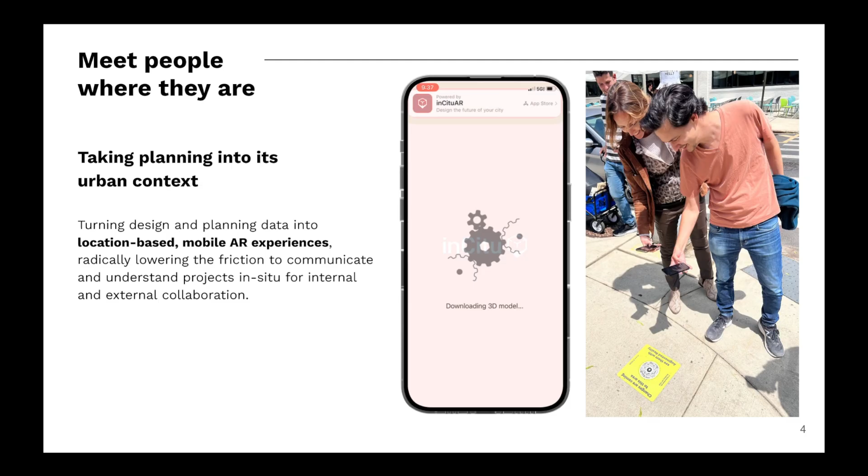Thank you, Nick. Kieran, thanks for being here. So Kieran Farr is the founder of 3DStreet. He started his career in video streaming and 3D software development, went on to leadership roles at video streaming companies like Vimeo, Bitmovin, and Brightcove. And in the past decade, he's become very active in transportation and environmental advocacy in your home, San Francisco, right? You've worked with organizations like Safer 17th and the Sierra Club to bring about positive changes in local communities. This is part of the work that led Kieran to develop 3DStreet and to productize these learnings to help planners and advocates more effectively.

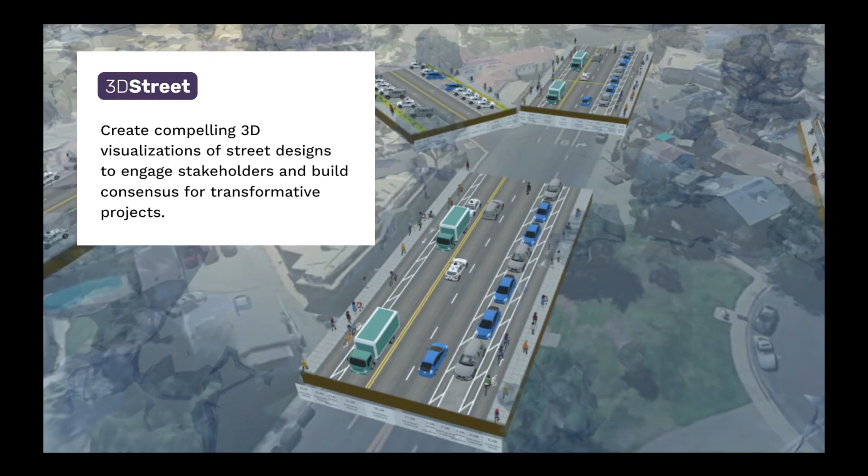And so, Nick and I thought it may be helpful to talk a little bit more high level about what are the problems that we're seeing in the market that everyone has, and then how do we use these tools in order to address these problems. So on the next slide, and this is not necessarily a new statement for some of you, but for some of you, maybe it's the right way to think about this, is that at the core of what we do is that we're trying to bring communities and stakeholders along for the ride of the vision that we have for safer streets.

One of the biggest challenges is that it's really difficult for most people to imagine that the built environment changes, and therefore it's tough to talk about what these changes could be at a level playing field. So why does this matter?

The impact of this information asymmetry between the community and professionals and engineers is that it leads to projects that don't have political support. They're pushed back, watered down, delayed, or canceled. That's what we're trying to improve—how can we do a better job of using these newer tools and working with communities.

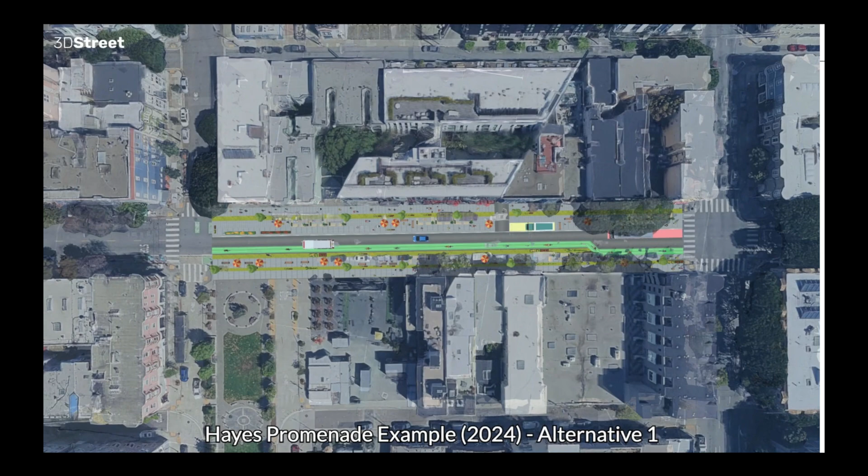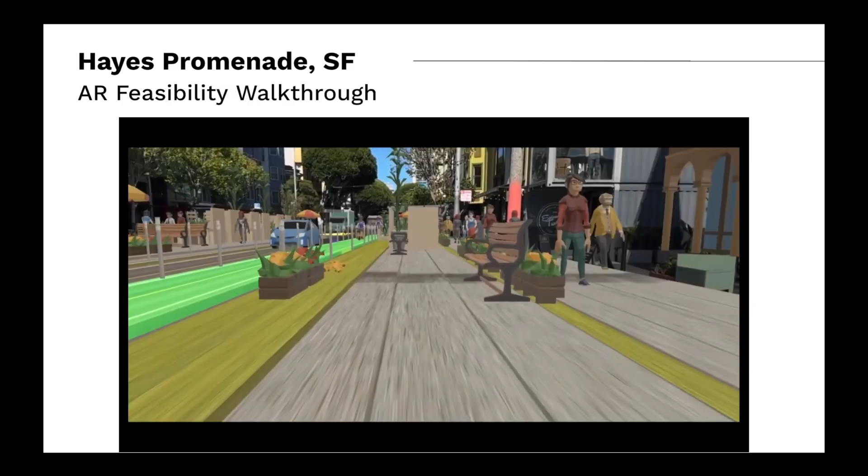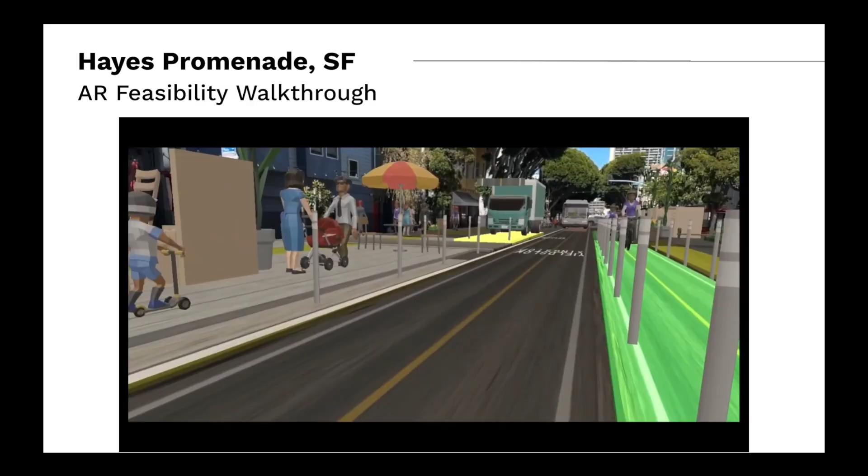But Andrew took it one step further, and what he did is actually converted this into an augmented reality scene. The word I like to use a lot is feasibility. What you're going to see here is that it's not beautiful, right? This is not going to win an award for the best rendering engine ever. The point of this is to be representative about the use of space and to be able to make those changes as rapidly as possible so that we can iterate on a solution that actually works.

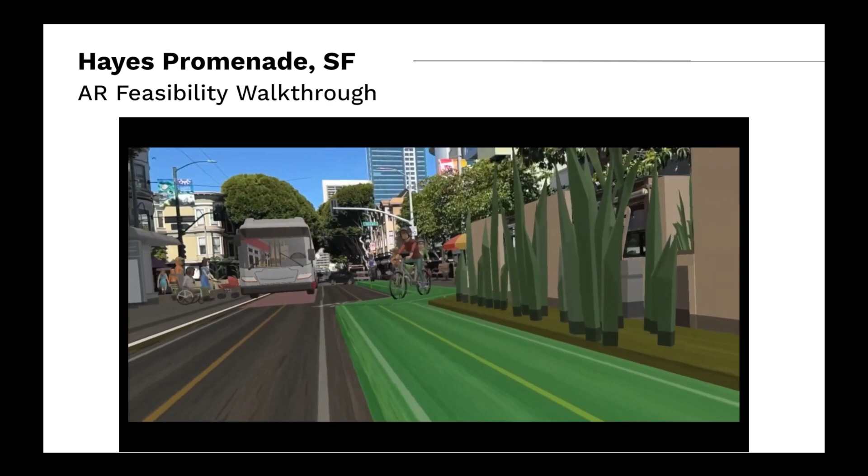As Andrew's walking through the scene, we see a couple key elements here, and he's going pretty fast.

One of the crucial stakeholders at the beginning is emergency vehicle access. Can the fire truck fit? Can there be enough clearance if they're going over the safe hit posts for the new configuration? The next thing that's crucial for this project is support from the businesses.

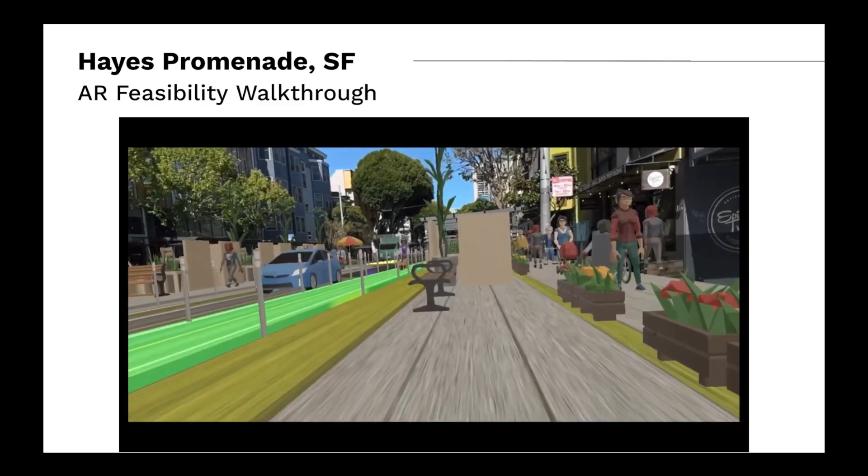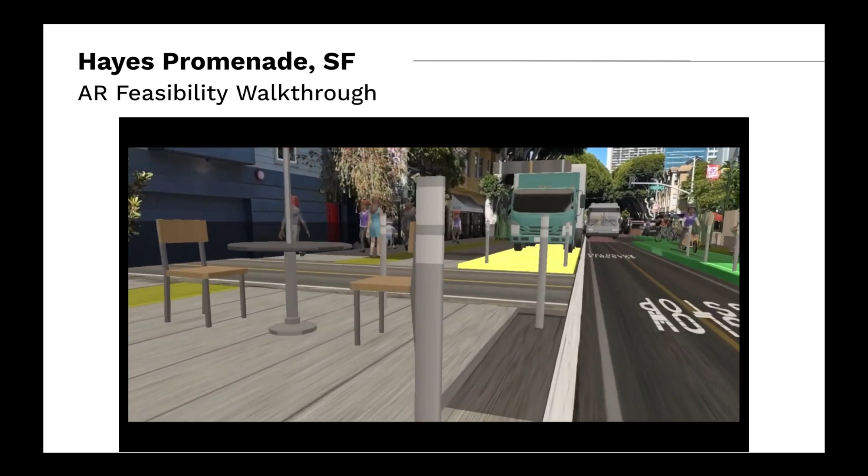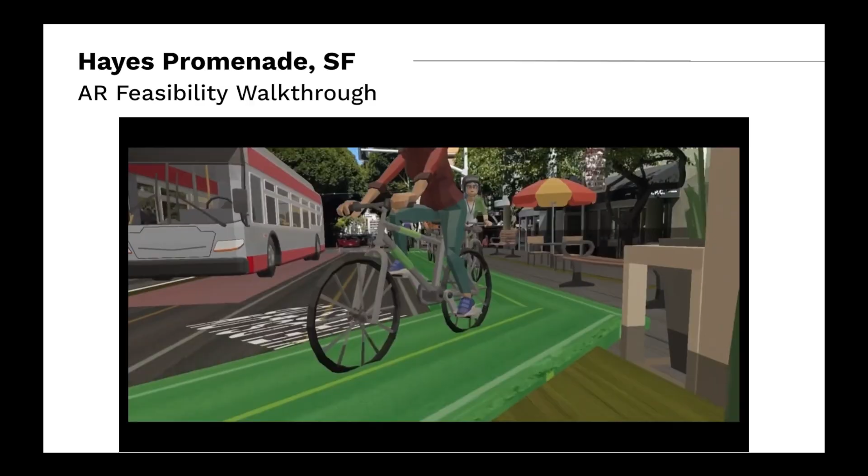There we look at concepts such as access to existing garages, access for loading or unloading, and then the number of new tables or seats these businesses could have—most of them are restaurants and bars. There's a lot of positive benefits the businesses can have, but they need to see that it's possible. This has been a crucial step to get those businesses and organizations on board to say, okay, it's possible.

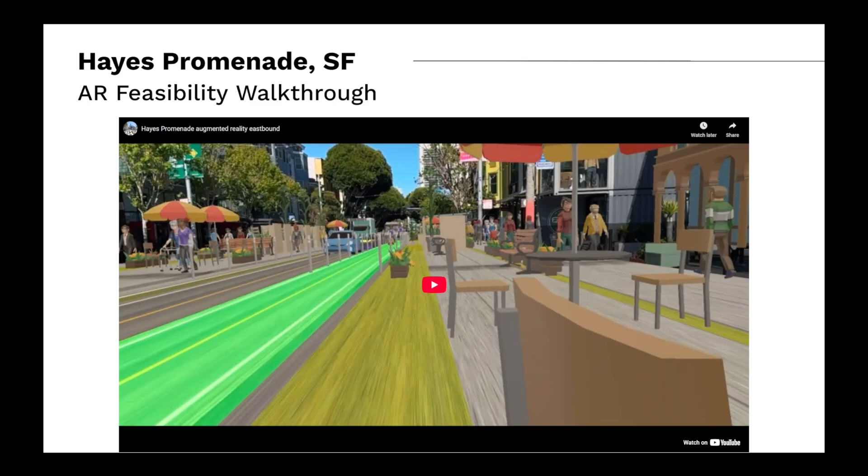That moves along to the next step, where instead of folks who are on the fence or even obstructionists saying this is not going to be possible, we can at least say, okay, I can imagine a world where we could convert this and still get the things I need for my business.

So just as a quick summary, the process was: create one example of a design, export that, go on site, record the video, and then use that asset in discussions with local businesses—actually showing the augmented reality scene live with community stakeholders.

Just to illustrate how quick it is, I was out yesterday morning with a model from 3DStreet that I brought into inCitu. I live in Queens, on Queens Boulevard, which had some recent street transformations with a bike lane separated by a new parking lane, and they've been calming this for a while. I took a quick model from 3DStreet into Queens Boulevard, and we could talk about how, like Kieran said, it's not perfect—this model wasn't designed for Queens Boulevard, so it's not really applicable.

But even using this random model, I was able to get a couple quick insights. One, there's maybe even more room for expanding sidewalk space on Queens Boulevard. I was also using the existing street lights to scale it. Another thing is you notice occlusion—cutting out real people and my body from the 3D model can be a useful tool for exploring how real people interact, and for communicating this way. You can see real cyclists and stuff coming through there.

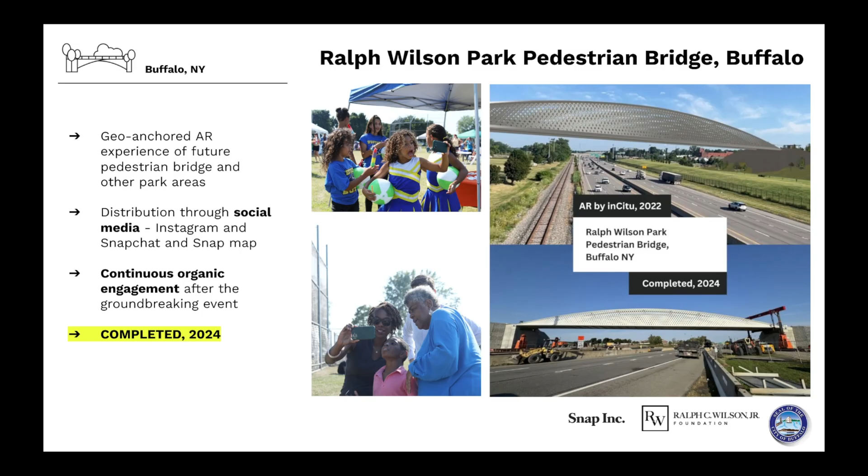All right, so maybe you could share about this project in Valencia Street. Totally, yeah, and I just dropped a link into the chat. This has become kind of an infamous project in San Francisco. Valencia Street is another high-intensity commercial corridor, lots of bars and restaurants. What this video is showing is an example of how we could show different street configurations.

Very specifically, they're changing from a center-running bicycle facility to a curbside bicycle facility. One of the biggest confusion points for a lot of community members is: how are we going to be able to deal with parklets? Where will this stuff go, and what does that look like?

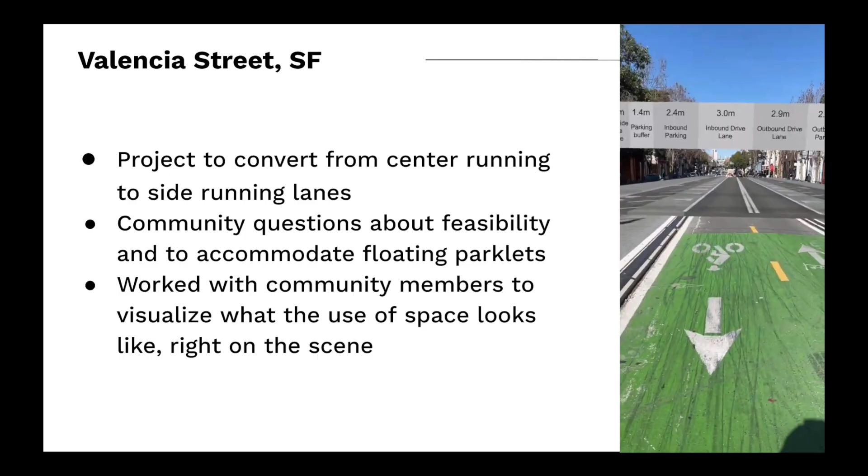And so this was one of a few different ways for folks to be able to understand what are those changes that are going to happen, and how will that affect both the users of the street and the businesses that are on the curbside.

So if we go to the next slide, I wanted to show a little bit more about how this was made, because this is something you can do within a few minutes to create something very similar. Then we can talk about different techniques you can use to make this compelling content that's going to help move your project forward.

So this is a view of what we had just seen in augmented reality, but from a little bit elevated perspective inside of 3DStreet, where you have the target redesign placed in context in the actual location where it's proposed.

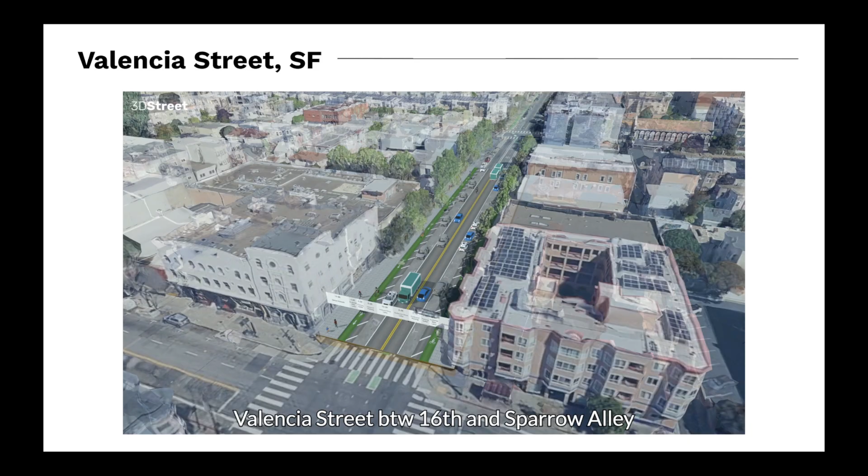So if we go to the next slide, here are the basic steps. We're going to go deep here.

The basic steps are: we want to actually create a scene, choosing a location, and we put in the street. We make changes to modify for current conditions. And then, very importantly, we have a new feature made for partners like inCitu, where you can export the scene as an AR-ready model.

Then inside of inCitu, you import that, you localize it into the proper location, you go to the field for fine-tuned placements, and then you can create those visuals that you'll need for storytelling, either for on-demand or live with groups like Nick was talking about for community building and engagement.

So we wanted to jump and actually get a look at 3DStreet. I want to give my screen share over to Kieran to show you a little bit about how it works.

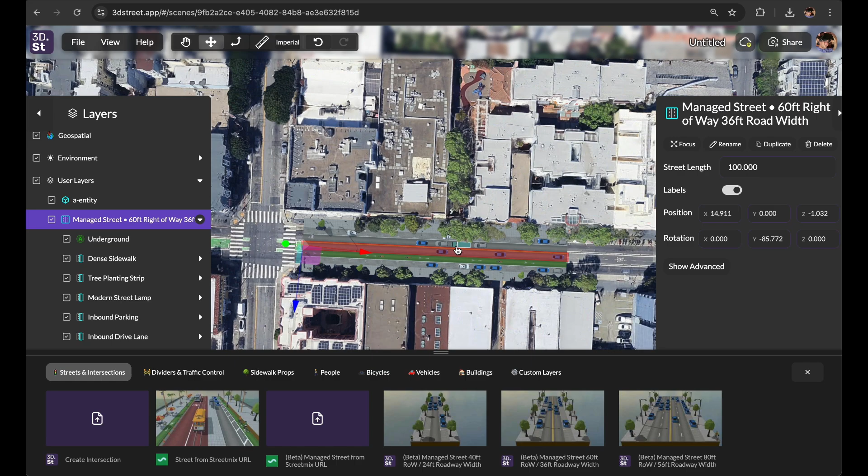Let's say we want to add a bike lane. So we'd duplicate one of those existing lanes, change it into a bike lane, change the width perhaps. This will not win any Safe Street Design Awards, but the point is to show we can do this very quickly, and it's not meant to be perfect. The goal is that we get something usable enough that we can then go to the field, see if it's feasible, and then rinse and repeat.

So we've done something basic — it's good enough for our test. We'll then click the Share button, and download this as what's called an AR-ready GLB file. This does a couple extra preparations so that those models are ready to be viewed in a third-party augmented reality app like inCitu. I'll press that button, and it'll take a second. Now we've just downloaded that GLB file.

I'll pause my screen share so we can see what that looks like from the inCitu application. We'll then take that GLB file and place it in the location. Great.

So once you've got your GLB file from 3DStreet, you can upload it to inCitu AR.

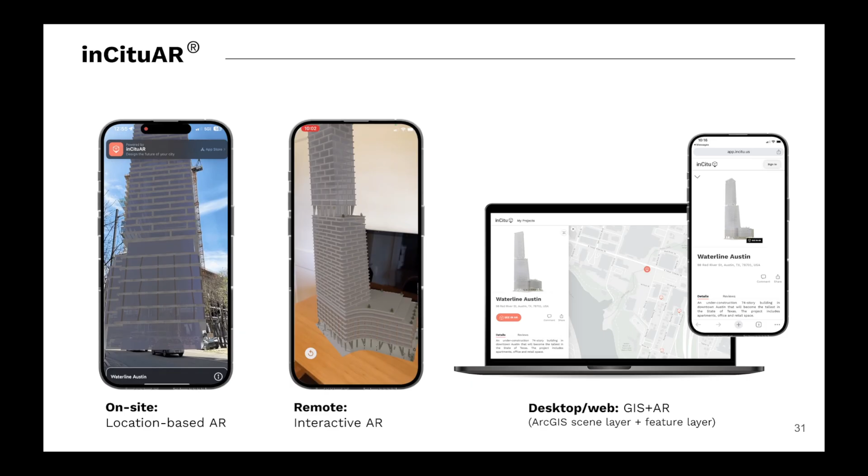So if your model isn't lined up with the georeference on the first try, you can make adjustments to fine tune it so that it looks the right way from the viewpoint that you're intending.

And then we're going to talk about, once you've got it lined up on the site, how to capture videos and content that you'll be able to use at meetings or stuff like that. So this is the step where, hey, we have something we'd like to share.

And what I have been learning is that there's another art to master, which is how do you then create compelling content from that? I'll share a couple of tips from the work that I've been doing, but there's definitely more to explore here.

And I would say that this is a category that's very interesting in its multidisciplinary nature, combining video production skills, communication skills, civil engineering skills, augmented reality design skills. Exactly, it all kind of comes together.

So what we're seeing in this example is a couple very purposeful decisions, where the placement of the model is purposefully offset from the actual location where it will start. We did this because it was confusing to people if we only showed the proposed conditions and you couldn't see the existing conditions.

Another thing that we did was to elevate the placement of labels. Inside of the 3DStreet app, you can modify the location of the labels that show measurements and the type of use for each lane.

And then you'll also notice it's casual but pretty effective to actually be doing the movements or motions that someone in the situation would actually be doing. In this example, it's walking across the crosswalk with a light, so it's relatively safe, but it's also showing the multidimensionality of it.

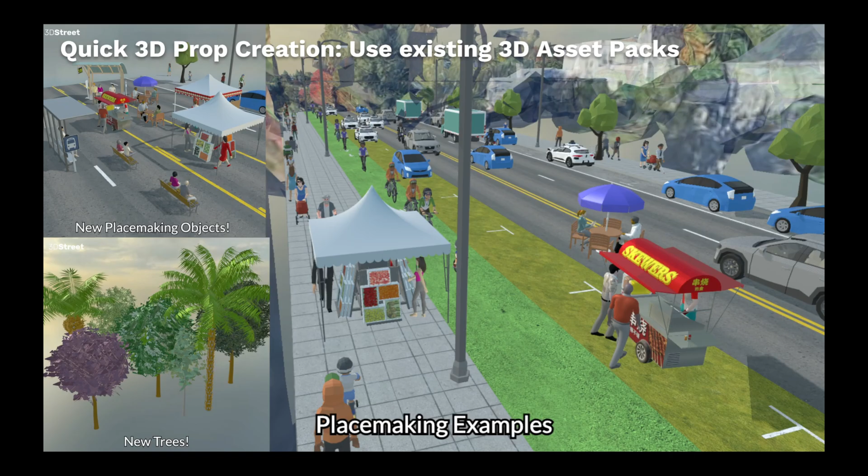The number one tool we've found helpful is having a library of very common objects useful for demonstrating these stories. On the next slide or two, you'll see some examples of more recent objects, and this is directly from user feedback. We hear what people are trying to do, we see the projects they're creating, and we're very responsive in figuring out how to empower everyone to do that. Some of the more recent additions we've worked on are literally placemaking objects: farmers market stalls, food trucks, outdoor seating, trees, foliage, all these sorts of things. What that all contributes to is rapid prototyping, so it doesn't need to be perfect, just good enough to represent the intent of how we could use our space differently.

For us, these are really popular. It's more than just designing a street, it's about creating the community. I'm very excited about what else the community wants, and what other things we can work with our users and folks on this webinar to create stories that are compelling and will actually move these projects forward.

We've been experimenting with easy 3D, ways to make 3D for rapid prototyping too. A couple of the emerging methods we've tried are photogrammetry, scanning physical objects, which is really accessible, and even workshops with kids for design charrettes. This could be really valuable: just use a phone app to scan a physical model into 3D, draw something up with paper, cardboard, Legos, or clay, and then get it out on the street really quickly.

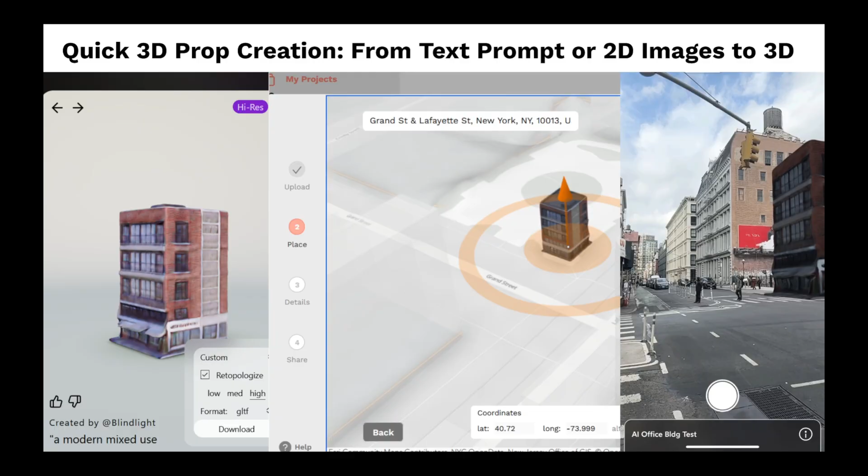So it's a great chaperone for new ideas, I think, to come in from all sorts of folks. So now that we've got to the end of the presentation, we can review our key takeaways and then open it up for questions.

Takeaways: a new one we're trying to introduce is that we can now use AR as a feedback loop. So we don't have to have everything finished and beautiful. The very purpose of it can be for rapid prototyping.

Number two is that we can use those prototypes as the outreach material, whether it's something fully finished or even just enough to convey what the intent is. It makes me very excited to hear all of the work Nick has done in terms of the group activities on site, it's excellent.

And the third point, which is really the underlying message, is that everyone on this call who's a member of this webinar can do this. It is within your power and capabilities. And if you experience challenges, we are here to make it easier. That's the literal vision and goal of our organizations, to make these things accessible to all ages and abilities.

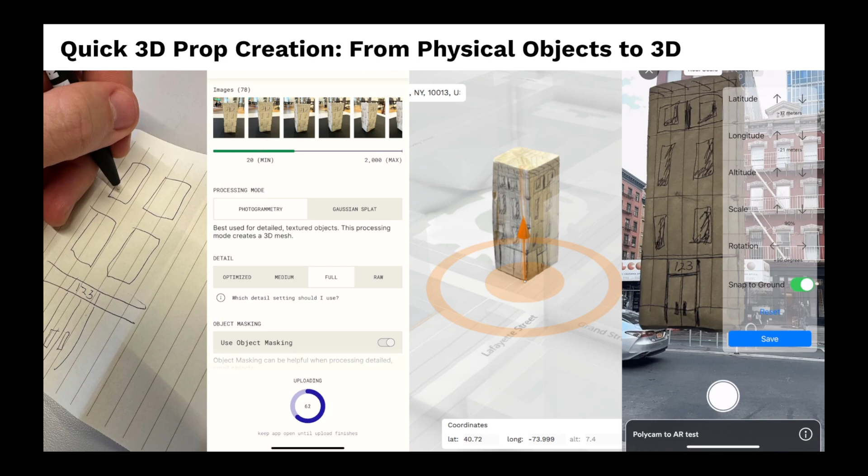And the question of fidelity is a big question, because what you're getting at is, what is the right level of fidelity to show what could be, but to keep the door open for change? To your point, we are definitely seeing that when you have something that is almost too perfect, people are scared to say, I want to change it, because they also don't feel as though they're capable of doing that. Whereas when you start to reduce back to basic building blocks, primary colors, simplified low poly images, then there's a feeling of agency, because there's less of that intimidation of, oh, I don't know if I could actually modify that.

And I would say this is an open question. I think there could be a lot of really awesome research to say, at what stage in the project is the right type of fidelity of visualization, and to put some actual evidence and research behind that. Because right now we're just testing it out. You're seeing all this stuff kind of real time. But I really love that question, and I don't think it's answered yet. I want to answer it.

There was a question about Gaussian splatting. If anyone doesn't know what that is, it's a type of creating point clouds, a way of capturing the real world in 3D in a very efficient, sort of real-time 3D renderable fashion. And I think we can take the meshes that you then convert from those clouds, but I think you've experimented with the splats, right?

Yeah, we really like Gaussian splats. I think the potential is absolutely there. It's a little bit manual and difficult right now to generate the splats, but we do support importing them into scenes. I think where at least I envision this going is that we'll need to sooner than later build some of the Gaussian splat features into these toolings to make it accessible. So the potential is absolutely there. The biggest barrier right now is the challenge of using some of these tools.

But for those that aren't familiar, Gaussian splat is a new technique for photogrammetry that, especially for foliage, hair, leaves, things that are very detailed, is much superior to traditional photogrammetry with a mesh that you'll see with Google Tiles. You can see the trees kind of get goopy and splotchy. Yeah, dreamy, like a painting kind of. Right. So there's tons of potential there. And yes, we technically support it, but what we're seeing is that there's still some challenges of making it accessible and easy for users to leverage that.